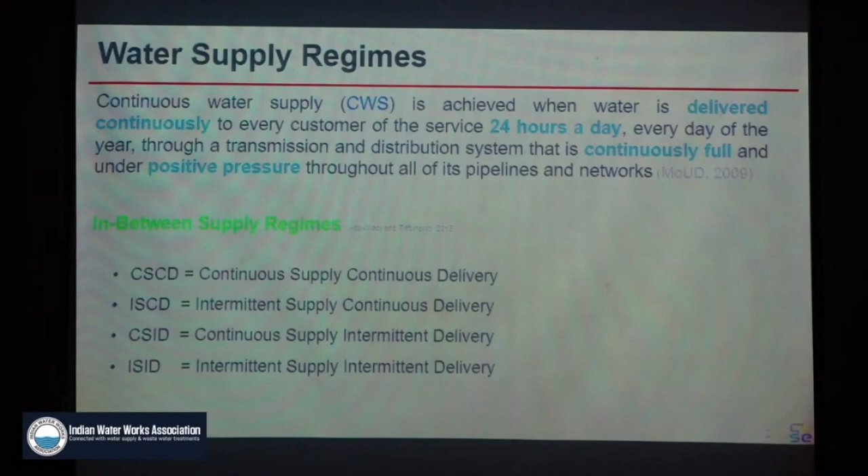So technically what that means is that we have supply patterns at the source to MBR, from MBR to ESRs and GSRs, and then we have the demand pattern exerted by the household - typically in the morning we get very high demand from consumers, and in the evening also we get some demand. But the peak factor given in the current old manual, the CPHEEO manual of 1999, dictates these kinds of peak factors, which basically assume that consumers are taking water directly from the municipality in a 24/7 fashion.

That is assumed in the design, that is envisaged in the design, but what is implemented on the ground is a very different situation or scenario. So what are the challenges for water supply engineers? It's a very challenging job in cities, because they are expected to supply water at a quantity of 135 or 150 LPCD.

In rural areas, the norms are different. They have to supply at a certain consumption pattern, not only quantity. Then there is expected residual pressure - currently we are trying to maintain 7 meters of residual pressure, or 0.7 kg per centimeter square. We have to design this for 30 years, or for mechanical parts, 15 years. Admissible losses have to be controlled to 15%, and we have to give good water quality, IS standard water quality. These are the challenges of a water supply engineer.

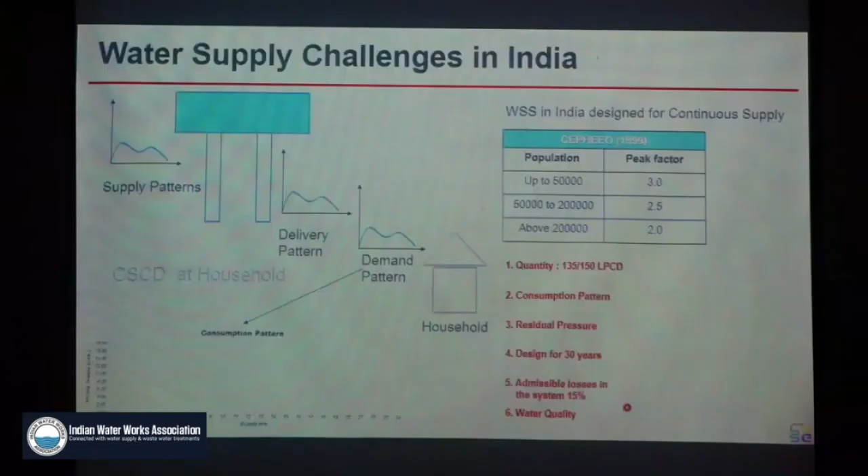So they are always on a task to perform on these particular parameters, to provide service to consumers. What is happening in India right now is we are following intermittent supply - sometimes intermittent up to the ESRs, and from ESR to household it is definitely intermittent in most of the cities.

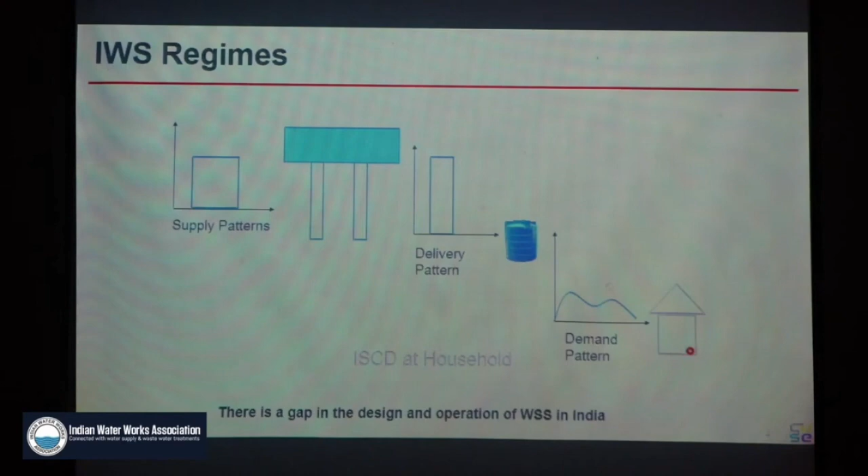And globally, this is not just India's problem. Let us understand that there is nothing unique about why it's happening in India - globally intermittent water supply exists, and a lot of cities face this issue. Mostly in the global south, we have this problem, and even in developed countries, the way they manage 24/7 is through highly pressurized systems, but it comes with very high cost.

Technically it is not very challenging to design a 24/7 water supply system. It is only about who will afford that, what is the affordability and reliability of that system. Africa, Asia, Latin America, Southeast Asia and India all have a tremendous amount of intermittent water supply. It's a global problem, and many researchers and universities are working on how we can fix this.

There are also opinions that in the current scenario, intermittency is also helping to reduce losses. How is this possible? We'll see - because if you have leaking pipes with very high loss, maintaining 24/7 will require more water than intermittency, and there are studies regarding this too.

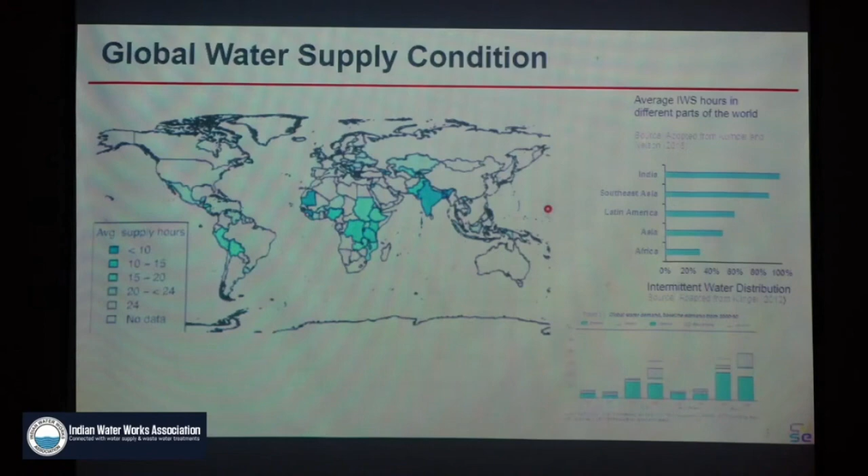So what is the reality we have? We have intermittent water supply ranging from 30 minutes to 12 hours per day, alternate day to once in a fortnight. Cities like Latur and Jalna receive very little water, once in a week or similar. Another issue is, even if we get water, there is inequitable distribution - some societies or areas receive more water than required, and some do not receive water at all.

Our government ministry is trying to fix the access problem, first providing access. Jal Jeevan Mission started when rural areas had only 18% household connections. Now if you check the Jal Jeevan dashboard, it's at 64%. So access is there, but whether we can reliably provide water in all seasons is the next big target. In cities, 60% coverage is there, and the situation is similar irrespective of water availability.

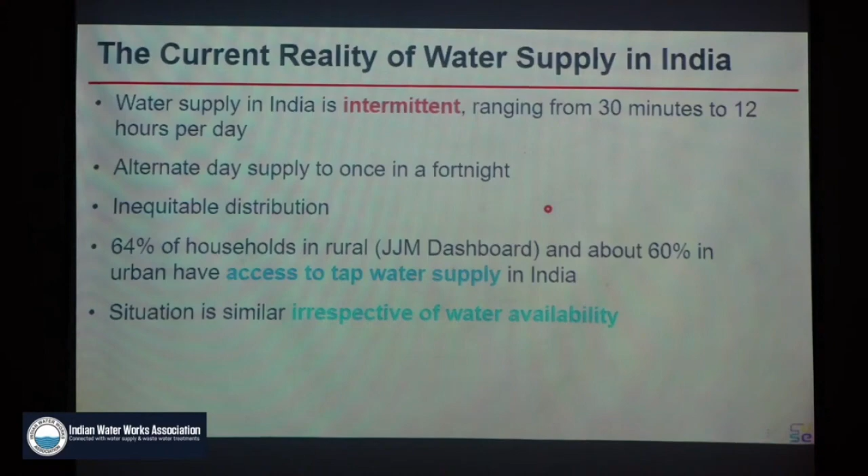So some people may get confused that there is water scarcity, hence intermittency - but that's not the situation. It is also because water that is available is not supplied or managed properly. For example, I visited cities like Ahmednagar and Nanded where water availability is not a question - the Godavari river is there, so water is there, but we are not able to distribute it properly, and there is alternate day supply, with some areas receiving water once in 3 days.

As Pathak sir has told, if people receive water reliably at a particular hour, consumers are happy - they are not demanding 24/7, because they are anyway storing, treating it at home, and then consuming. So their requirement is just daily supply. But there are 14 cities which receive water once in 2 to 4 days, 4 cities receive once in 5 to 7 days, Bid receives once in 8 to 10 days, and Jalna receives once in 10 to 12 days.

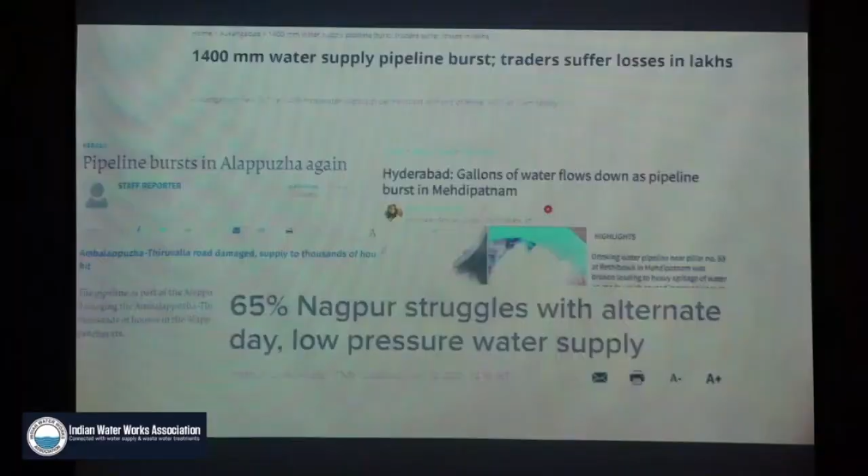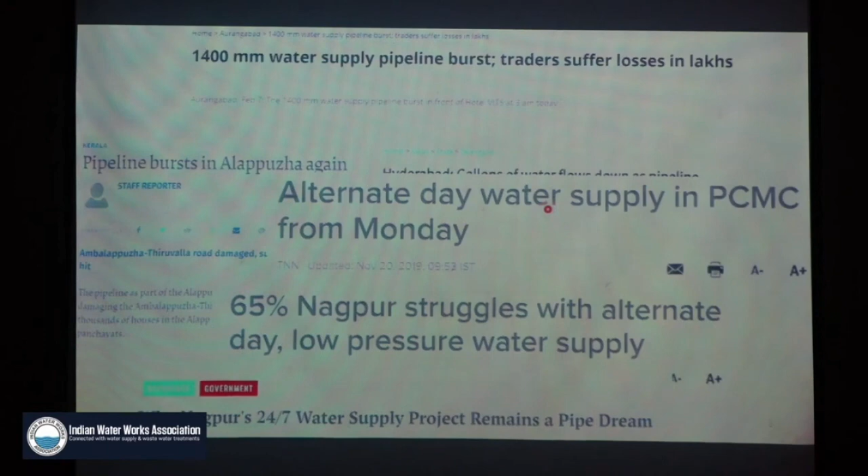So this is the reality we have in our cities, and nothing particular about Maharashtra. This is the scenario in the entire country. This is just news from Maharashtra, but if you see other news, everywhere there is a problem of pipe bursting, leakages. Nagpur city is struggling, most of the area is not getting water, in some parts it gets alternate day water. Pipe bursts in Kerala, Hyderabad, PCMC, and that's why 24/7 water remains a dream for many cities. We will discuss that.

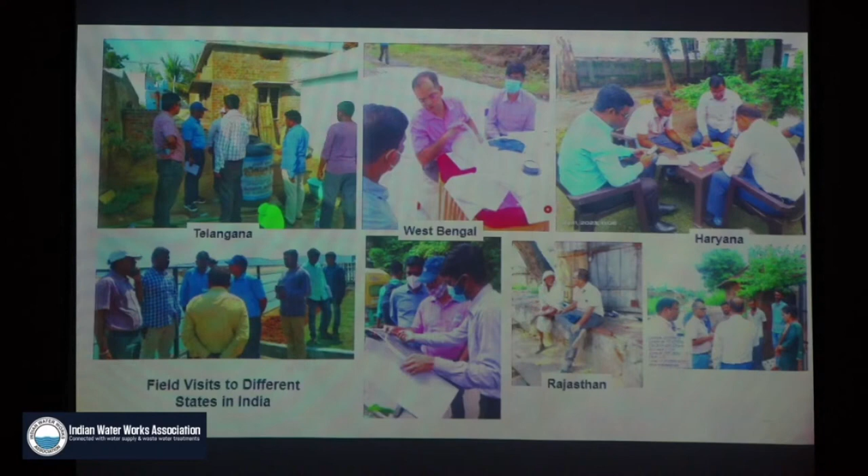So I have studied these water supply systems across India, whether it is rural area or urban area, variety of projects and research investigations. We have studied schemes and programs of different governments, different municipalities. I was part of one of the large projects of water audit, where we studied the water audit of around 30-40 cities, and the losses in the systems are 30 to 40%. In some cities it is 50%.

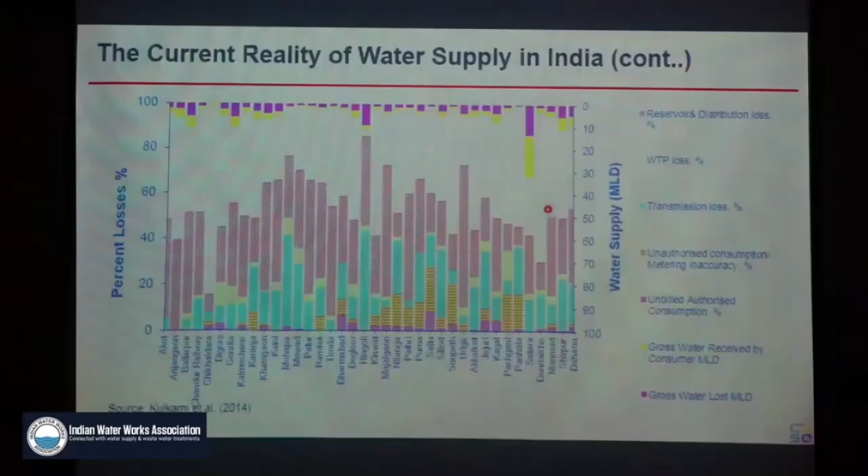So what is happening is we have tremendous amount of losses. Our pipe upkeep, pipe maintenance is not good. So whether it is the effect or cause, if you try to do a management study, we are in a situation where we do not know whether it is an effect or whether it is causing something else, because we are trapped in this particular vicious cycle of water supply system failure. What is a vicious cycle?

You start from any point and you will reach back to the original point again. That means we are trapped in a circle where our infrastructure condition is very poor because of lack of good planning, lack of good analysis tools, lack of good relevant design methods. We adopt design methods suitable for developed countries, very advanced sophisticated software tools which are not relevant to Indian conditions. We just adopt those tools blindly and try to design in offices and then implement. So we have tremendous problems in design and analysis itself - our designs are very theoretical, they do not correlate or match with the ground reality, and when the contractor implements that design, there is a failure, but nobody challenges what the consultant has designed, what was envisaged in the DPR, and what is happening on the ground.

So that is the situation we are having, and that leads to a poor infrastructure condition. Then we have poor service, that leads to poor service quality. That means people are not getting reliable water supply. People are getting alternate day water, people are getting low pressure, neighbors getting more water, you are not getting enough water, so people start using pumps and other interventions. So those things start happening, and as service quality is poor, consumer satisfaction is poor.

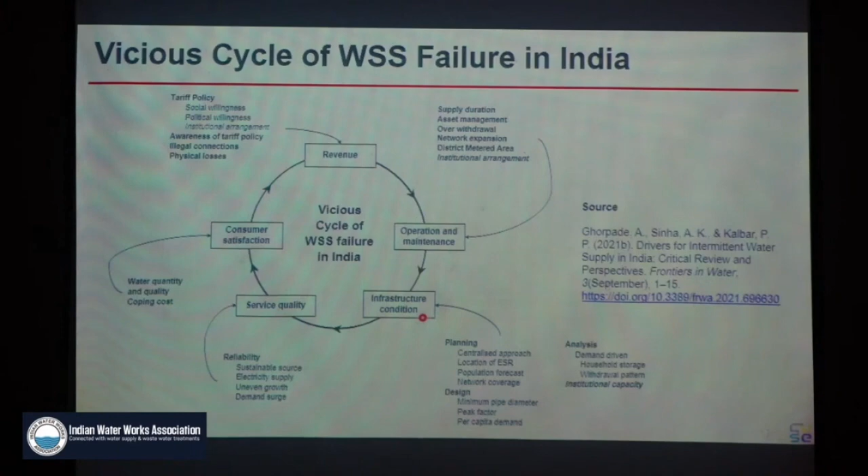So let us understand why we are then not getting 24/7 water supply. What are the technical challenges? Is it such a technically difficult issue?

If you open the 1999 water supply manual, it dictates a 24/7 guideline. We do not need a new consultant or some international consultant to teach us how we should have 24/7 in our cities. Yavatmal city is such a fantastic example.

Maharashtra Jeevan Pradhikaran, from 1972 to 1984, implemented 24/7 supply using a floating reservoir. We have just not documented it, and we have not replicated it enough for it to become our current practice of creating water infrastructure. There are very good examples from Maharashtra Jeevan Pradhikaran and different state departments of doing things differently and innovatively.

But we are not following our own good practices. That is the issue. Now our entire discussion right now is that developed countries have 24/7 supply. Why do we not have 24/7? The reason is not technical, but there are many other socio-economic conditions.

What developed countries have, and what any textbook or manual shows, is an arrangement where the average flow comes from the pump, and the city is served in between the pump station and the tank, with a floating reservoir. What is a floating reservoir? The inlet and outlet are the same pipe.

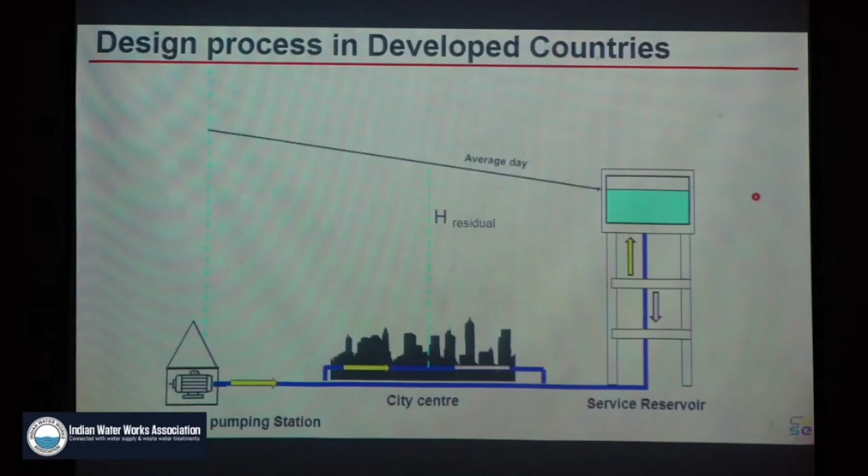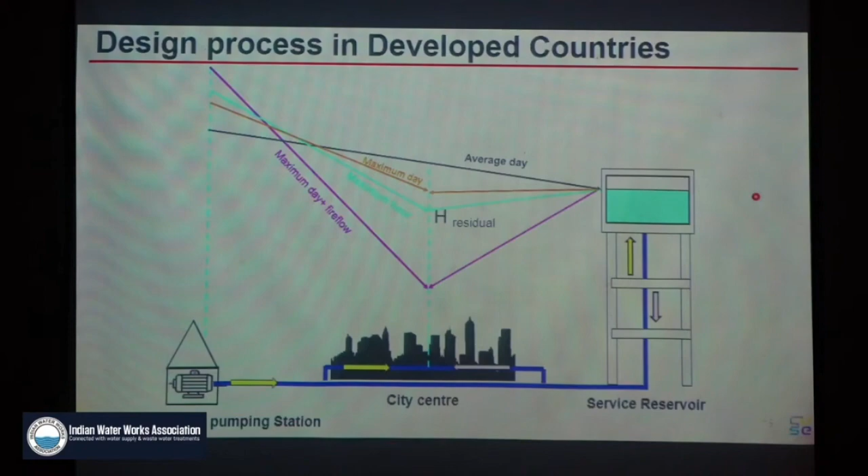What developed countries are doing isn't new, but how they manage it is they design their system not for maximum day demand or maximum hour design, but for maximum day plus fire flow. Their systems are equipped to supply water during fire flow also. That is the benefit of this particular arrangement.

Now, is it technically difficult to design? Many experienced practitioners here can design such a system. Then why are we not adopting this? The issue is the residual pressure required to maintain in this system is 17 to 50 meters.

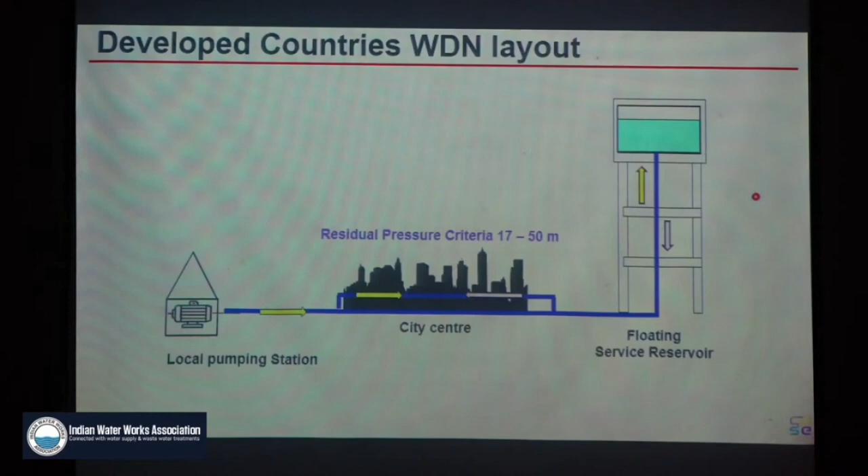That's too high a pressure to maintain. And to maintain such high pressure, you need very high quality pipes and very good operation and maintenance protocols at the municipality, which are typically missing right now.

We as a country are growing, learning, experimenting. So there's nothing to blame on any municipality, but if you suddenly try to do 24/7 in one zone, we fail because the upkeep isn't happening. Somebody can replace all the pipes, bring new infrastructure, supply more water, and do 24/7 -- that's technically not a challenging problem.

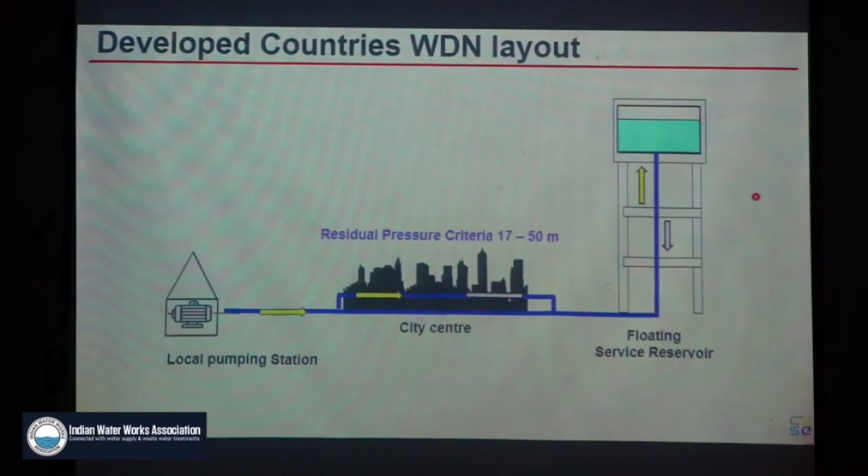How you can do 24/7 with low cost and low resources, innovatively, is the real need, and we have to do it in our own way, not what developed countries are doing, because the technical design is very easy. The socio-economic concern is: who will bear the cost?

Currently there is no demand because people have invested in storages -- household storages. Everybody stores in a sump or overhead tank, which is not assumed in the current design. So our design guidelines do not match the ground reality. And how are we managing then?

We manage by raising water, whether by gravity or pump, to the ESR or GSR, and then supply it to the city. Now the pressure we're trying to match is 7 meters, 12 meters, or 17 meters. Typically, I have not seen the average zonal pressure reaching more than 7 meters in cities. So we have not even achieved 7 meters as a benchmark yet -- we are still struggling to achieve good pressure everywhere.

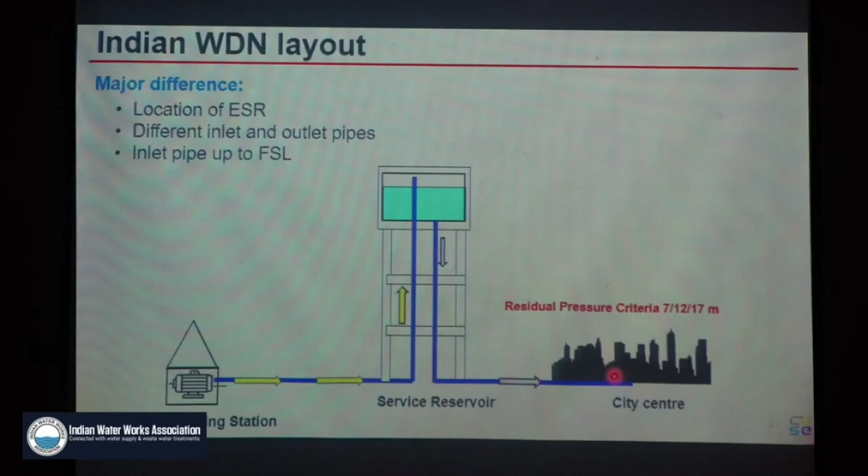So the hydraulic model we use assumes that the water level is at the lowest level of the tank. You start your level from the lowest point in the tank -- that is the worst condition -- and we design the entire system from there. But what happens is the withdrawal capacity. What is withdrawal capacity?

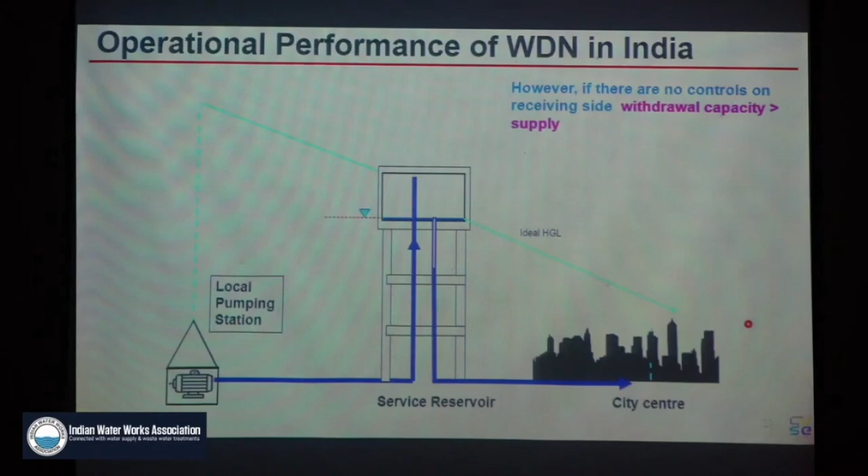Consumers fetch water because they have not received water for the last 23 hours. As soon as supply occurs, they try to fetch all the water in one moment. So the withdrawal capacity is too high compared to the supply, and that gets the tank empty.

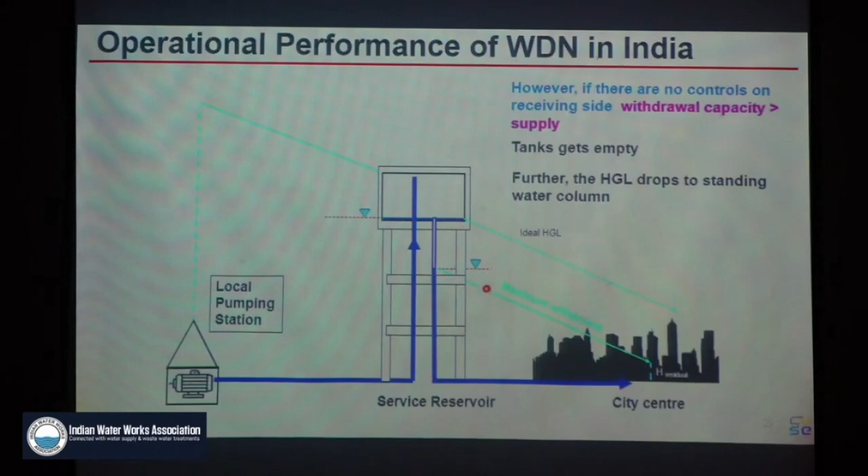In many municipalities I have observed tanks are bypassed. Many cities are bypassing the tanks, where the transmission lines or bulk transfer lines are attached directly to the distribution. That is the scenario we are operating with. And this is the operating level we have to understand, to see at what level the tank is actually performing.

This kind of measurement we are doing in a variety of cities, and this is one video from our lab which shows that if the withdrawal is very high, the water level goes down. So the water level is somewhere here.

Tanks are always running low, whereas if they are not at that level, air entrapment happens from the tank itself, and we get an air-water mixture in the network, which is very difficult to predict in terms of how it will behave in the entire water network.

So we have air entrapment issues in the system. Our tanks have issues with filling and operating at full level, and intermittent water supply adds air to the system. Talk to the people who operate it and they will tell you the difficulties they face in taking air out of the system. Our hydraulic models do not account for such scenarios in a routine DPR design, so our operating levels end up somewhere in between.

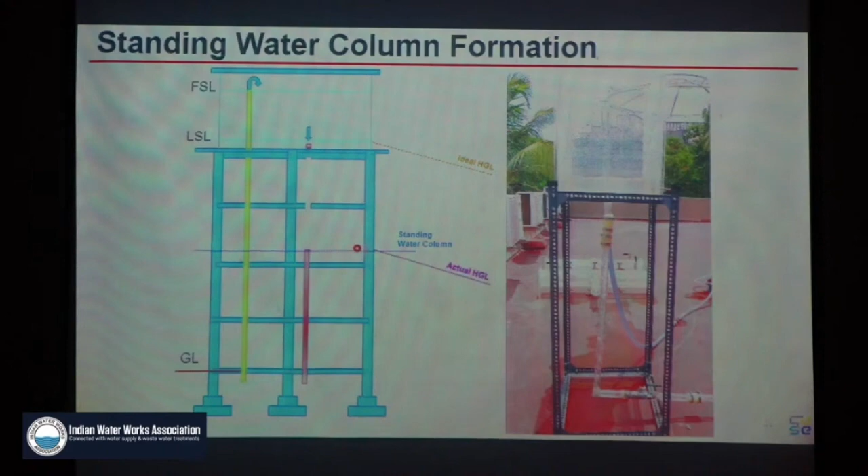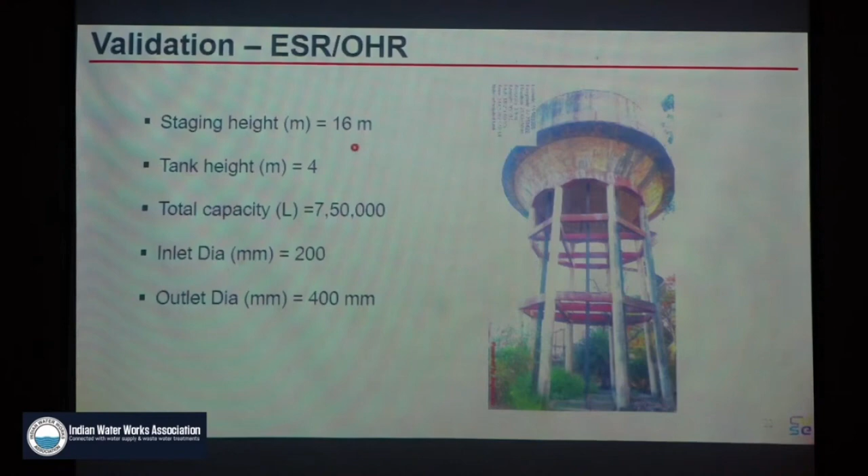Based on this, we have developed some new methods of hydraulic modeling. With this confirmation after lab tests, we have gone to many places and studied them. This is one city where they had an overhead reservoir with a 16 meter staging height, and what we observed is that after 40 minutes the tank gets empty because of too much withdrawal.

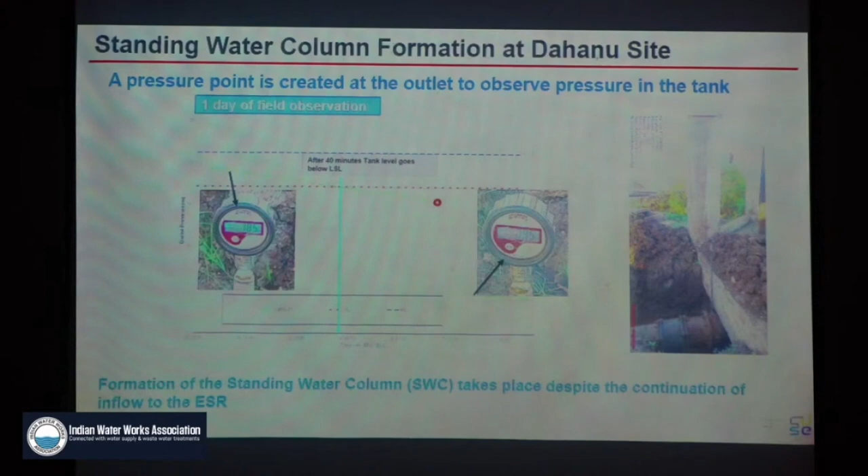This kind of ground validation I don't see in the DPRs. Those kinds of ground studies are not happening, and we just assume a theoretical design of 24/7 supply, thinking we will achieve 24/7, which will not happen.

Then what is happening? On ground, our field engineers face tremendous challenges to supply water, because the design says something else while the ground reality is something else. So what are they doing then?

What they are doing is, typically the land is allocated only at one place. That's a municipal planning issue. Tanks need to be distributed across the city equally, only then will the hydraulics work. That's why hydraulic engineers have to communicate with the municipality.

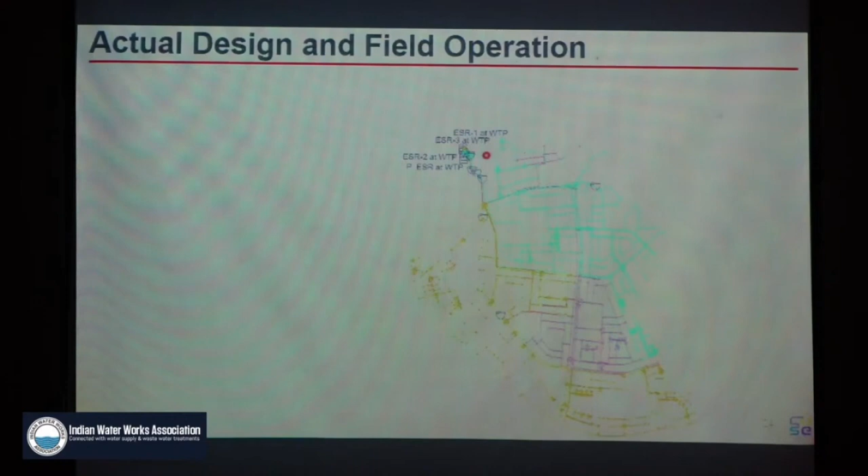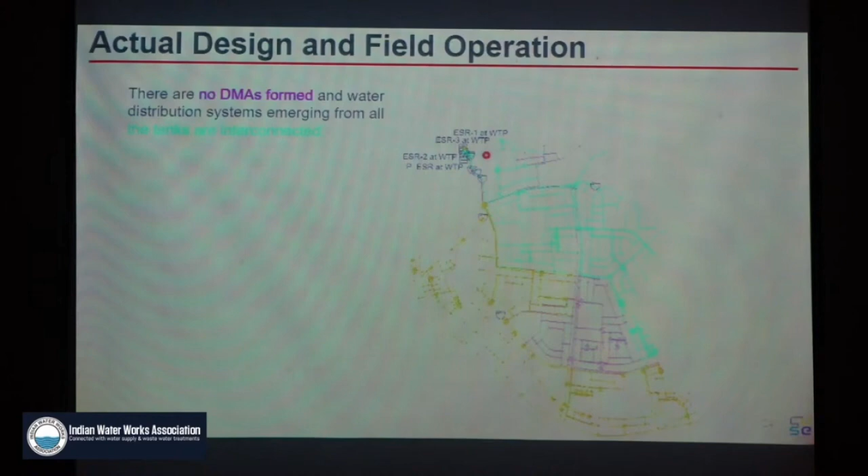All the land is allocated only at one location, and there are no district metering areas, DMAs. It is impossible to implement these DMAs because of the segregation needed. In India, a lot of political interference happens on ground, so you may design a DMA, but after one or two years people will fall out of the DMA and interconnections will appear.

There is no control on withdrawal. Even if you consider 10 liters per minute as the flow from a tap, multiply that by the number of consumers, and you will see the withdrawal capacity is much higher than the supply. So your tanks will ultimately get empty.

So the resort the operators or field-level engineers take is to create small zones like this, two small zones, put a valve, another valve, operate one valve for 30 minutes. One zone they will supply for 30 to 40 minutes, then close that valve, open another valve, and supply the next zone.

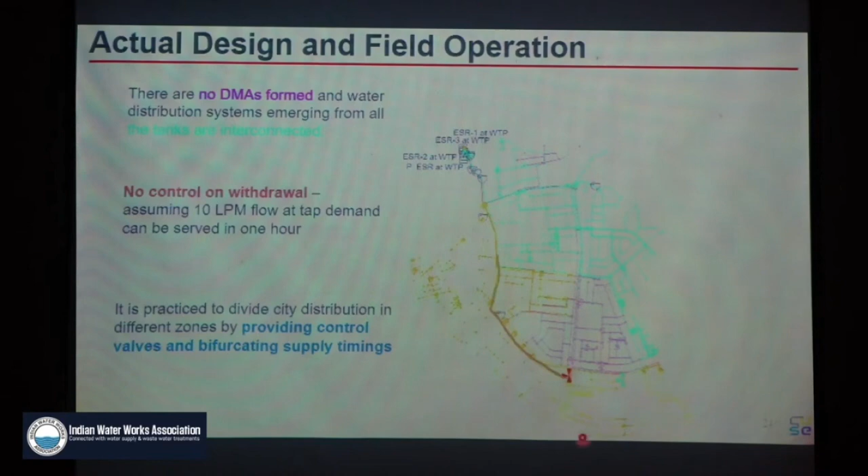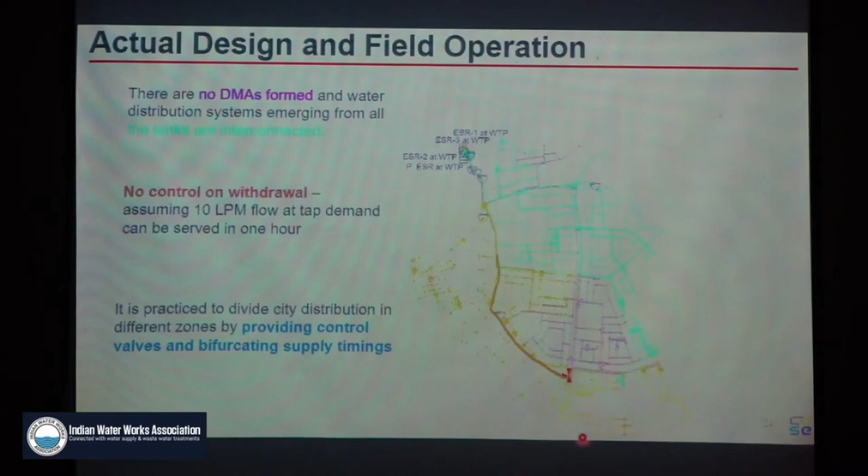So in the city, one zone has many operational valves, which increases wear and tear and reinforces the vicious cycle. That's what I mentioned in the initial slide - we are stuck with this particular operation, which reinforces the poor performance of the system.

So the big challenge is whether the current hydraulic modeling is relevant. The current hydraulic modeling is demand driven, meaning it assumes the consumer is wise and will close the tap when water is not required, and that they have meters - but that's not the real scenario. So our hydraulic models also do not account for storage.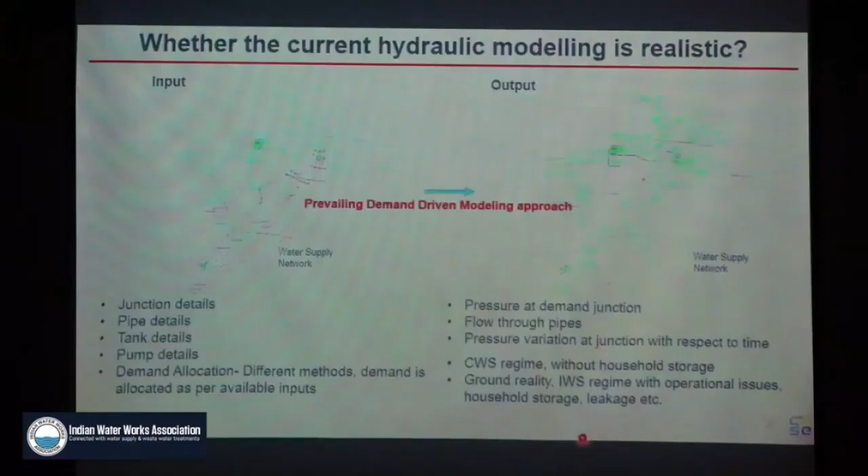But that's not the reality. Every household has storage. So our hydraulic models in practice are not relevant in the current time. So we have developed a new hydraulic modeling method called flow-starved water networks.

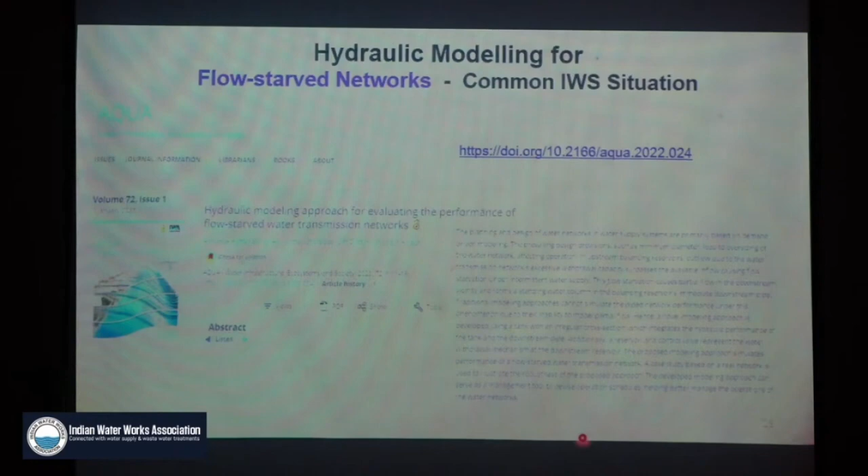How we can model the flow starvation situation - that is one of the research projects for my PhD student, who has developed a new method of flow-starved water network, because whether it is transmission line or distribution line, we have flow starvation as a phenomena.

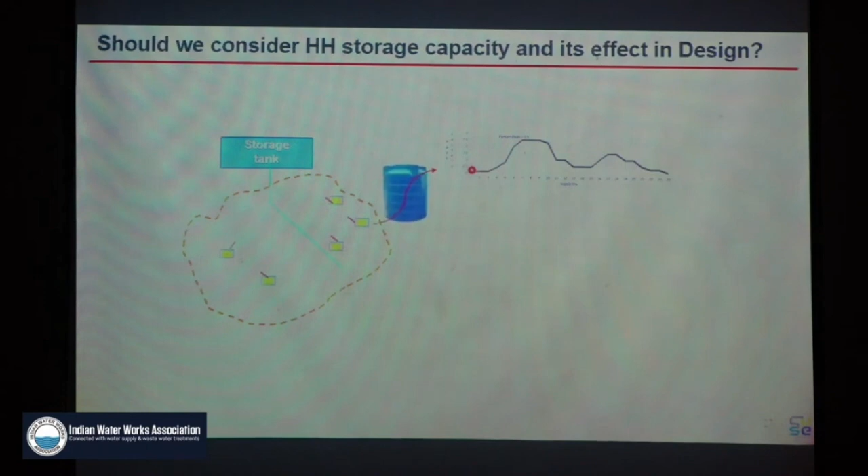And then we have to take into account household storage capacity in the design. We cannot keep ignoring it, because the manual says this is the consumption pattern, but in between comes the storages, and unless we account for those, we will not be able to successfully operate the system.

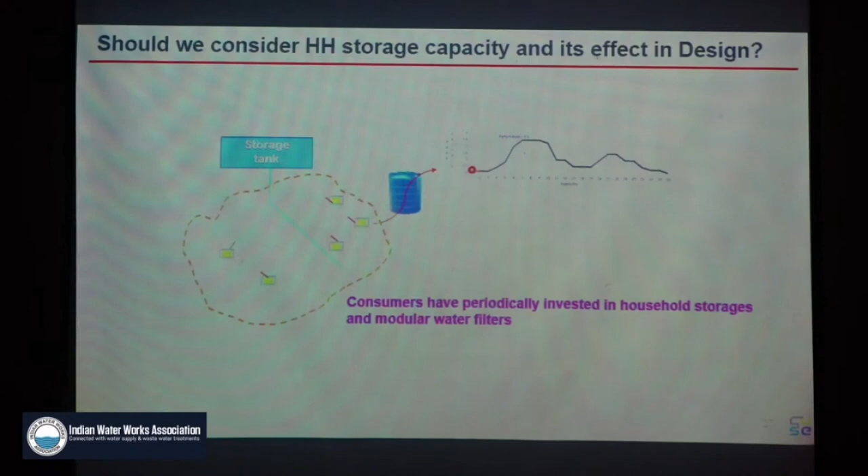So consumers have periodically invested in household storages and modular water filters. They are basically happy if you supply for 1 hour with good pressure and good flow.

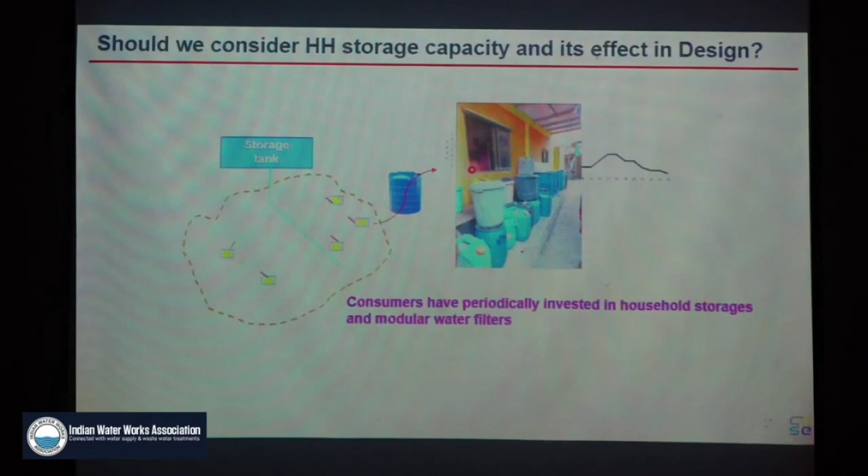And this is from the village scenario. Go to any village, so many drums and plastic containers they have to store water for 2 to 3 days. And you go to housing societies, they have big sumps, 2 to 3 days storage in the housing societies.

So whether rural or urban, we have the same scenario, and hydraulic design models have many data gaps. So if somebody is saying that I have a hydraulic model and everything will be solved, it is not the situation. The ground reality is very different.

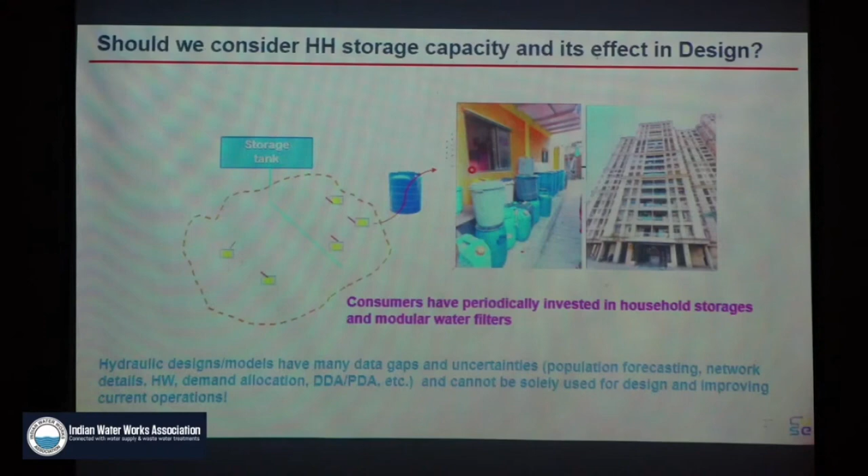We have air entrapment, we have tremendous data gaps, we do not know what the pipe situation is on the ground. So we have to take hydraulic models as a decision support and not the final decision, because if the hydraulic model says this, that doesn't mean everything will function properly. That's not going to happen.

So what is the quest for 24/7 water supply in India? Where is this quest coming from? Basically in 2003, the government of India started this particular initiative, that the essential goal of cities should be 24/7 water supply. There is no disagreement about it, that we should have 24/7.

And there are a number of pilot projects in Karnataka. World Bank has funded this particular initiative. They have tried, but there are no replications. And based on the evidence from developed countries, continuous water supply has benefits, but it comes with a cost - the cost of higher tariff, cost of better operation and maintenance requirement.

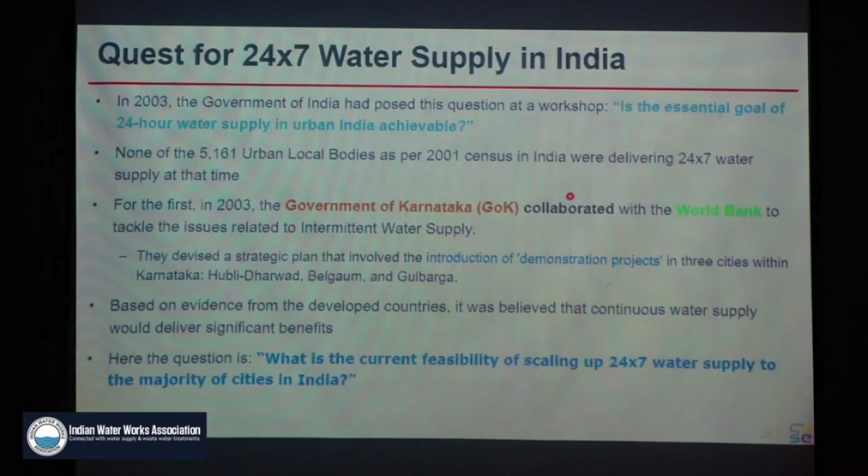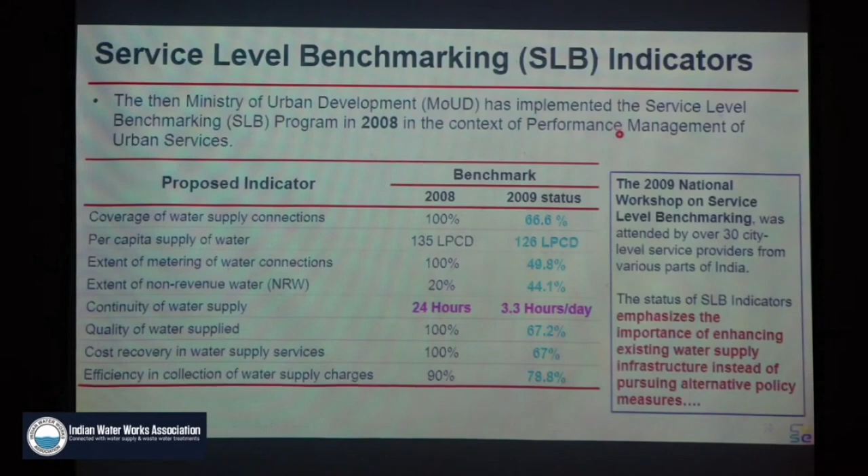So the question is, what is the current feasibility of scaling up 24/7 water supply to the majority of cities in India? We have forgotten the service level benchmarks altogether. That was the initiative started by the then Ministry of Urban Development in 2008-12, and we have not achieved the basic service level benchmarks, but we want to plan for 24/7. I think it cannot be a goal for cities to directly jump from not achieving service level benchmarks to 24/7.

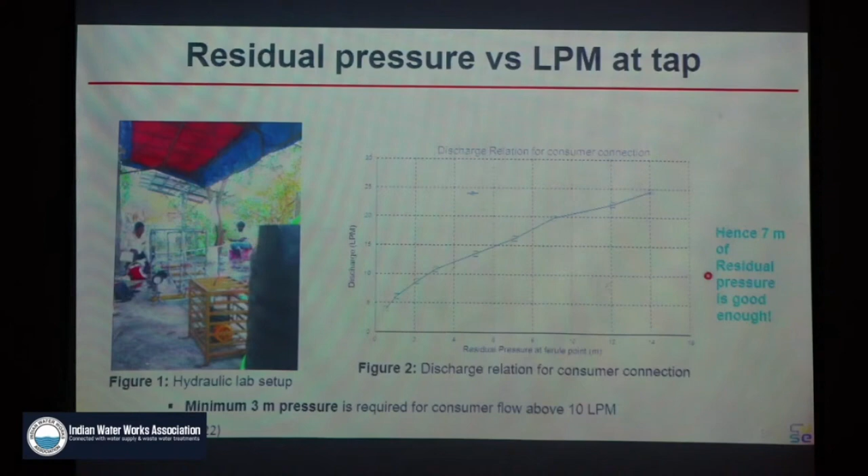If somebody wants more than 7 meters, that has to be justified - who will bear the cost has to be justified, and it is also international practice. Thames Water UK, which runs the system 24/7, their design guideline is 10 meters - 10 meters they are expecting in the ground.

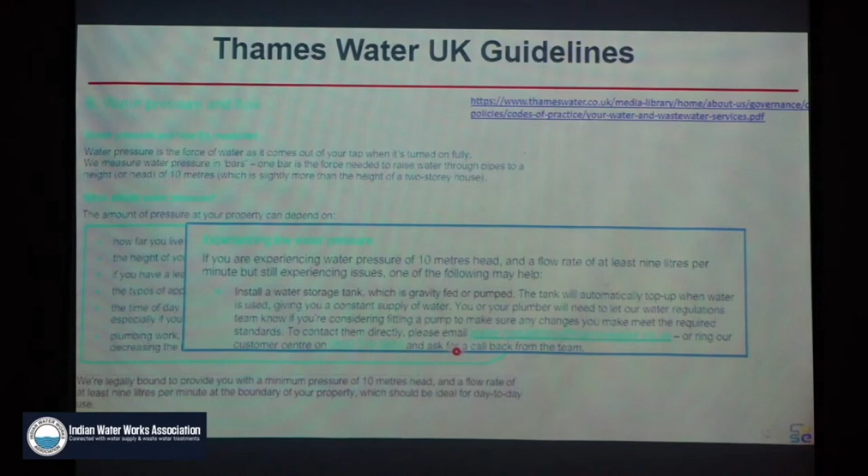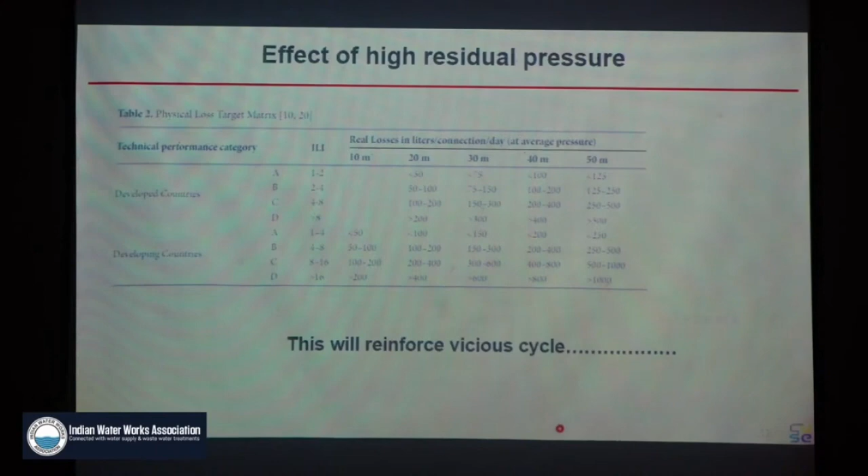So there is no need to revise the current guidelines of 7 meters, because we are struggling with achieving 7 meters first of all. The issue is, if you raise pressure in the system, it will lead to higher losses, because pressure and leakage rate is directly correlated. So if you have higher pressure, more leakages will occur in the system, and so unnecessarily if you try to pressurize and do 24/7, more losses will occur, more water consumption will happen, and that will lead to more economic losses to the municipality.

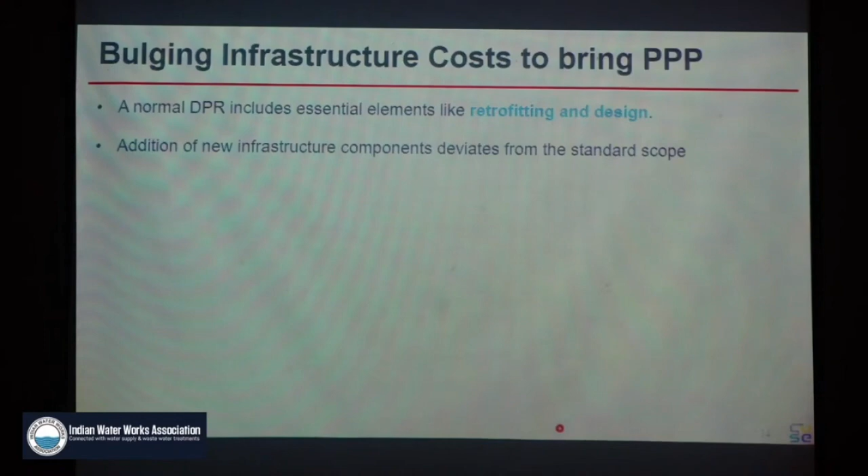What is happening is bulging of infrastructure cost. People want to bring PPP, and there are experts of PPP here to talk about it. But what I observed is a normal DPR requires retrofitting, but for the sake of bringing public-private partnership and many other things, DPRs are bulged with new pipelines, new household service connections, new metering, and many other things - automation and SCADA, which may not be relevant for a particular municipality, and unnecessary inclusion of new components is happening. The cost is inflated, and the DPR is made bigger. And that's what everybody wants, because a bigger DPR means everyone is happy in the entire supply chain. So that is what I observed as an academic viewpoint.

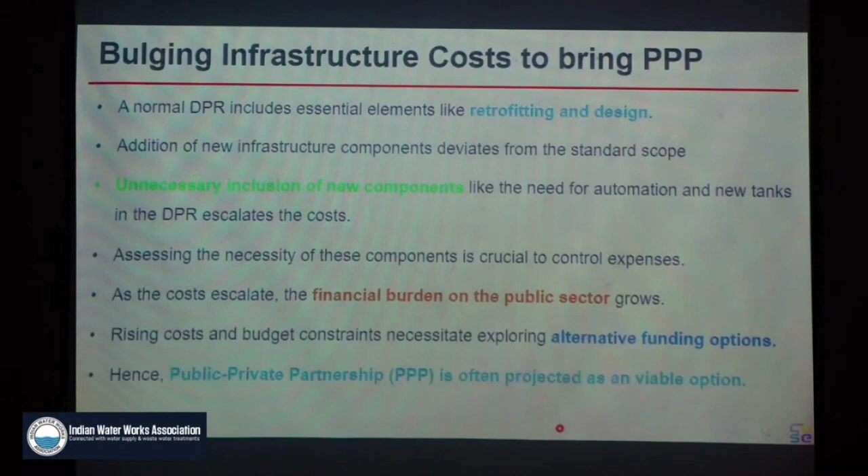This is a financial burden on the public sector, because unnecessarily replacing all the pipes and bringing automation when not required is a financial budget problem. There are resource constraints in 24/7 supply, as ULBs have financial constraints and rely on funding from national schemes.

Average connection cost is around 10,000 to 20,000 rupees, varying by city depending on topography. Hence the investment required is 1.2 to 2 lakh crore rupees. Where will this funding come from if we keep replacing pipes and bringing new such projects? We will never be able to cope with the new infrastructure needed for 24/7.

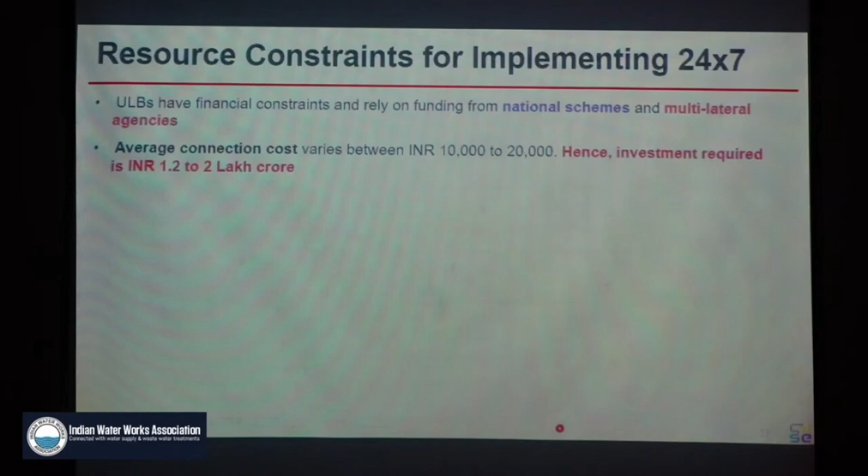So we have to take the retrofitting approach, because even JNNURM and AMRUT have limited funding. It's not like infinite funding is available. Hence there will be no sufficient funds available anytime. People say, oh we have funds, but you have funds for 5 years now. What will be the upkeep of the system after another 5 years? So we have to do things differently.

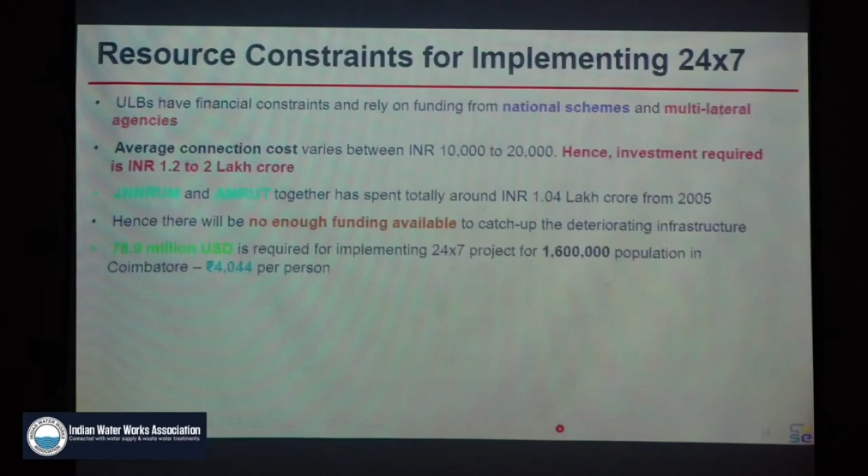The cost of connections has to be declared in each project. At the same time, increasing tariffs is extremely difficult. The DPR may have an assumed tariff system, but when the operator or municipality goes for implementation, there is tremendous opposition. So again we are back to square one, no funds for maintenance.

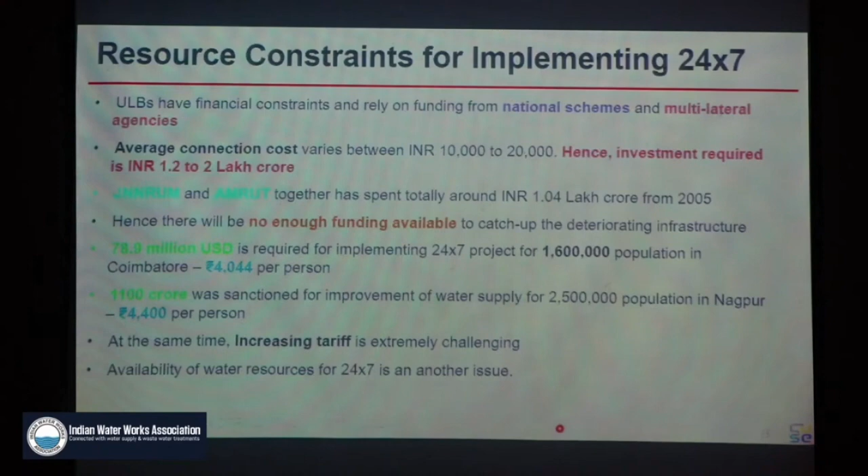And availability of water resources is sometimes constrained for 24/7. So what's wrong with the 24/7 model then?

Assumptions and flaws: the 24/7 models implemented in India assume there will be good engineering and management practice, which is missing in the country. Even if you have a private operator, the upkeep remains poor.

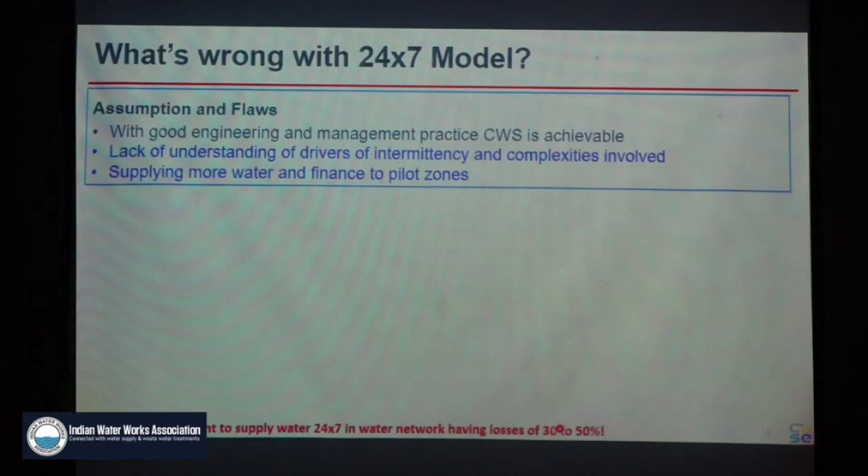There's a lack of understanding of the drivers for intermittency - why systems converted to 24/7 shift back to intermittent mode. One zone can be supplied more water, 2 or 3 times, and declared 24/7. Is that wise? Is that a true 24/7 strategy - replacing all connections and pipelines in one zone, supplying more water, and declaring it 24/7? I don't think that is true 24/7 in any sense.

There's also bias in pilot selection. The peripheral zone, the easiest option, is selected as 24/7, not the hardcore core city. And the selected pilot projects have low cost - anywhere you go, they have lower cost than other city zones.

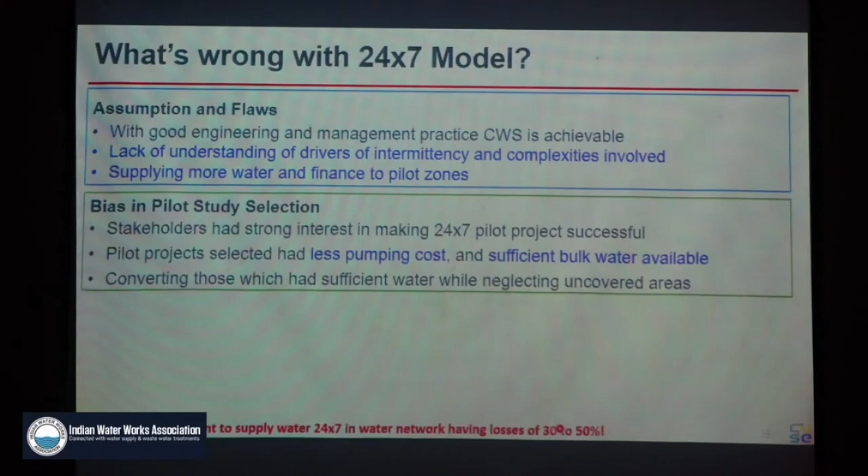Then there's consumer behavior. I have seen many 24/7 projects where consumers still store water in the house. They will not give up their storage - they store, filter, and then drink. There's also a floating ball valve in the tank, which closes whenever the tank gets full. So consumers are anyway withdrawing water as if in intermittent mode.

So why supply 24/7 at all? This needs to be assessed on a case-by-case basis. Is it prudent to supply water 24/7 in a network having losses of 30 to 50%? You may lay new pipelines, but 5-6 years down the line they will again have more losses. This wise crowd can decide whether such a scenario should be implemented.

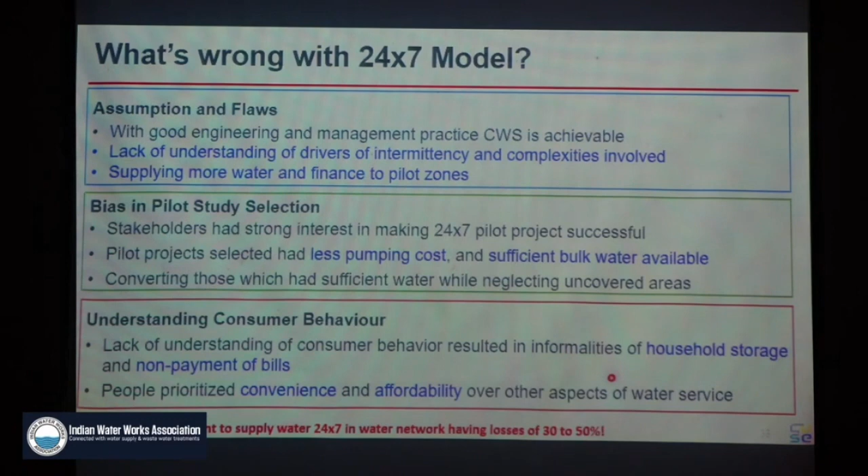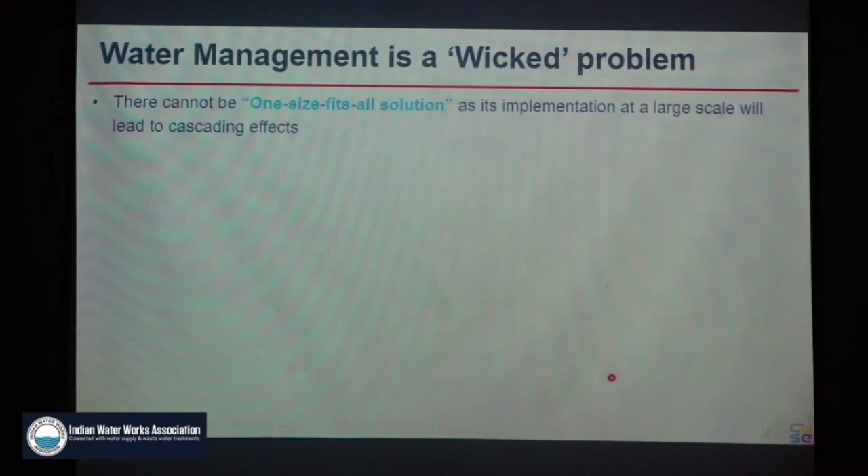Now I'll talk about why we need alternate pathways. Water management is a wicked problem - approaching it from any side is difficult because we haven't understood the problem correctly first. Shooting solutions without understanding the problem creates more problems than the solution itself. There cannot be one-size-fits-all solution. Deciding at one level that everyone should follow the same approach will not work in our diverse country. Each city has its own different topography; central areas have different demand than peripheral areas. So one solution will not work everywhere.

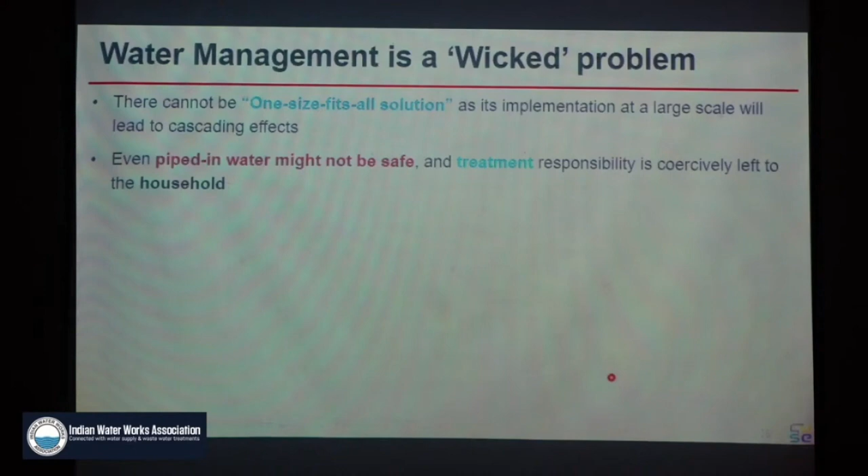Even piped water might not be safe, because pipe water supply may also have contamination. So people are always resistant to drink directly from the pipe - they will always use a filter. Ultimately, the treatment and quality part is left to the consumers, whether said or unsaid.

Household product models are not scaling up. We have household water filters, but we are also spending on water treatment at the main distribution system level. People's ability to take personal responsibility is shaped by their circumstances - if they get only 1 hour of water, or contaminated water, they will install filters, and that has happened historically in India. Even slums and communities have community drinking water arrangements, with jar systems from filtration.

Research regarding safe water has focused on point-of-use or point-of-collection models. Now developed countries are shifting to not a centralized water treatment system but a decentralized one, because treating it centrally and bringing it to the consumer will again add contamination. So people in developed countries are researching how we can treat at the point of use, whether at the household level or at the community level.

Safe drinking water is often conveyed as a short-term measure with no discussion of when long-term measures will be implemented. So only short-term initiatives are taken.

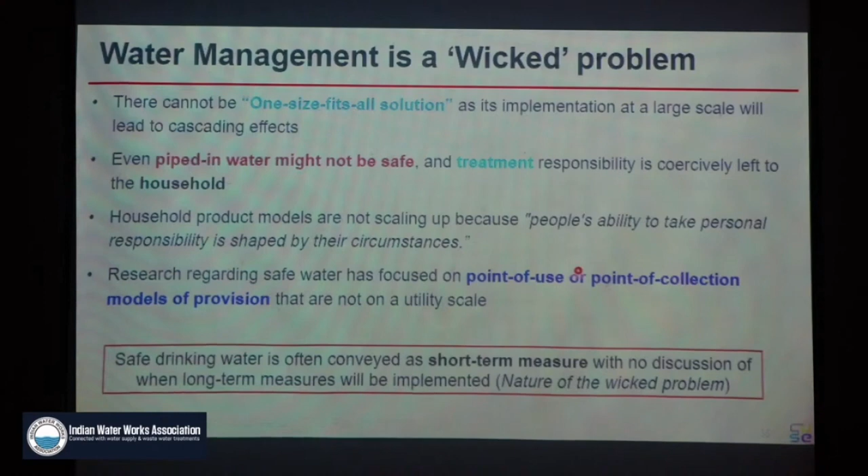Why do we need alternate pathways? As I said, it is a wicked problem, and a 24/7 system is financially unsustainable, with very high operational and maintenance cost, and more data other speakers may show. Safe water quality is not ensured even in 24/7 systems. No replicable and sustainable model exists in India. Emerging contaminants is a big issue.

Fortunately, Mumbai has surface water sources, but many cities rely on river water or groundwater, and those are getting contaminated. So even if you have treatment, that treatment will not remove emerging contaminants such as microplastics, pesticides, residual pharmaceuticals, and very toxic pollutants that are available in the river system nowadays. So we need to rethink this entire problem.

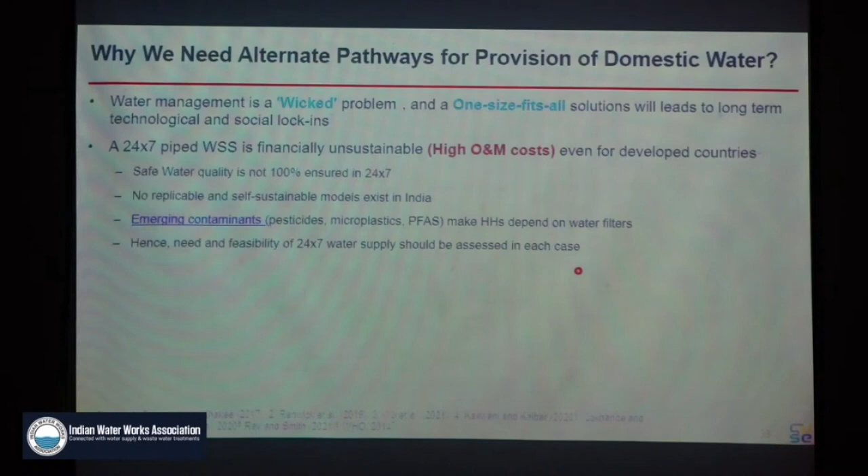Hence, the need and feasibility of 24/7 has to be taken into account, and focus on treating the required quantity of human consumption, because we need 3 to 5 liters of water for drinking. Treating the entire volume of 135 liters to the highest quality - we have to think now whether there can be any other alternative model, and that kind of experimentation needs to be done.

So diverse and distributed water systems with provisions of circular economy, because circular economy is needed in today's time. That means we have to recycle, reuse, reclaim the water in our systems, and then segregate the drinking water quality from other quality of water, so that effectively we will bring sustainability and resilience to the system.

So scale decentralization - that means we have highly centralized systems, one water treatment plant for an entire city. That will not work in future, because if that plant fails, what will the city do? Delhi had a flood problem, and most of Delhi was affected. So we need a scale decentralized system - smaller systems, not very small, but scaled systems, in a decentralized way.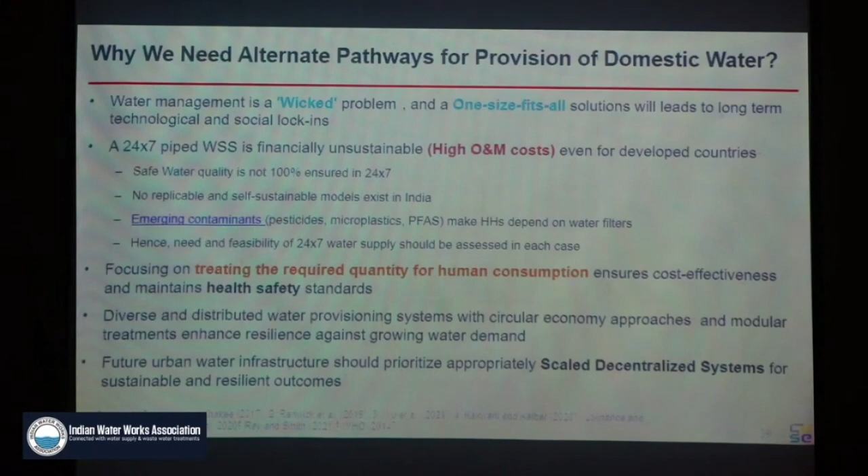That is the way - that is what I call leapfrogging. Mistakes developed countries have made, we have to avoid, and we have to leapfrog to more wise, better systems in our context.

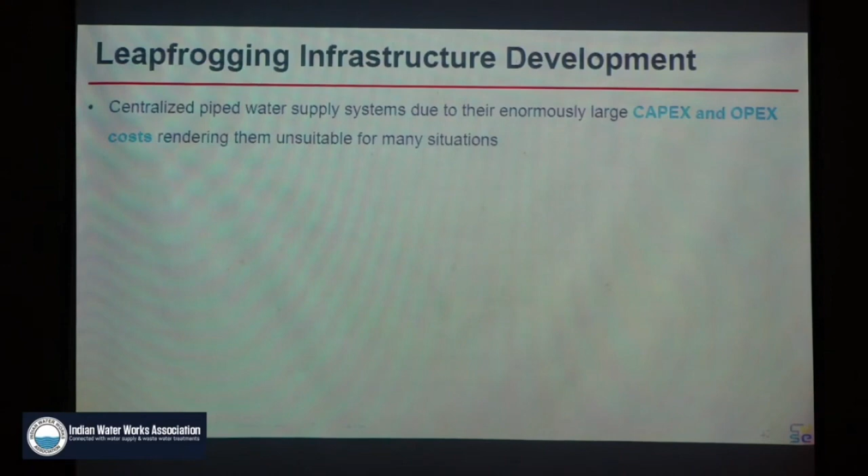I have a strong belief that our engineers in municipality and state governments have good capacity. They need a better chance to design systems as they want, because centralized systems come with high capex and opex. And even if 24/7 supply ensures water that meets current standards, residents will still use household filters, because they will always be worried about water quality.

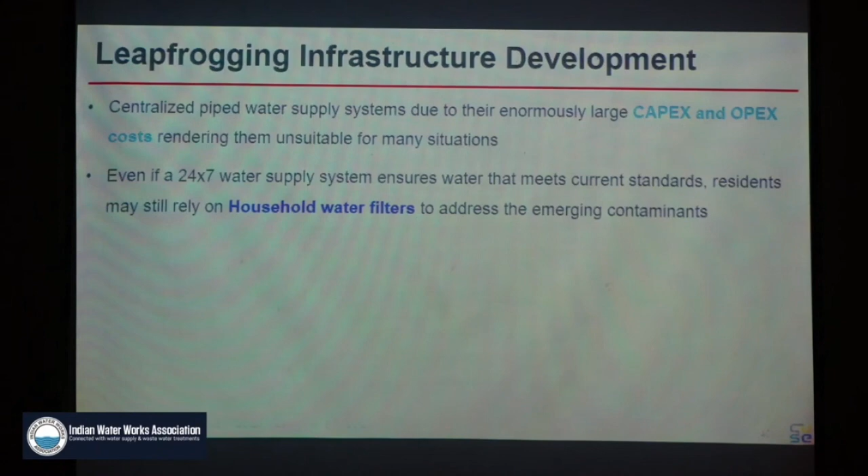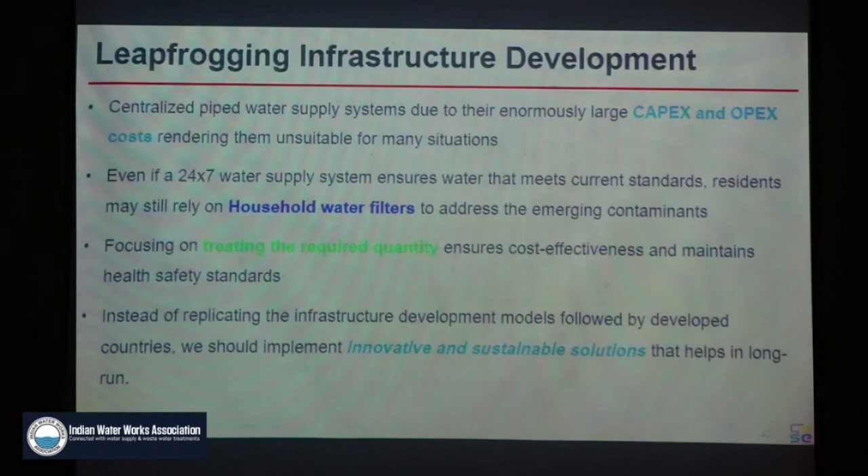So focusing on treating the required quantity ensures cost effectiveness. And instead of replicating the infrastructure models of developed countries - because most of the time we are following what developed countries have done and not what our country needs - innovative and sustainable solutions are needed that will help us in the long run.

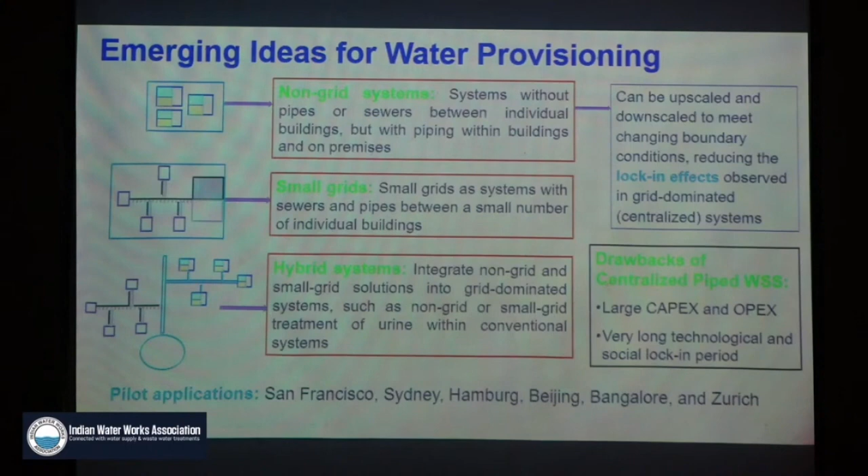So emerging ideas are small non-grid systems, small grid systems, and hybrid systems. These three kinds of systems we need to follow and experiment with, not the 24/7 kind of system always.

In summary, water management presents complex and multifaceted challenges. There are tremendous amounts of challenges in this particular arena. Solutions to water management problems may have unintended consequences and require adaptive strategies, because if you do not keep flexibility for the next 20-30 years, we will be stuck in the system for a very long time.

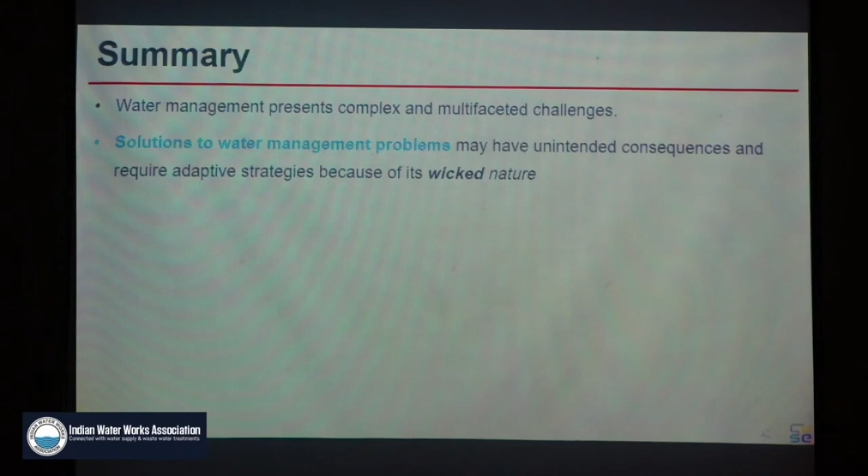Breaking the vicious cycle of water supply systems requires meticulous planning, which focuses on infrastructure development with a retrofitting approach, not a new infrastructure approach. So we have not worked on the retrofitting approach.

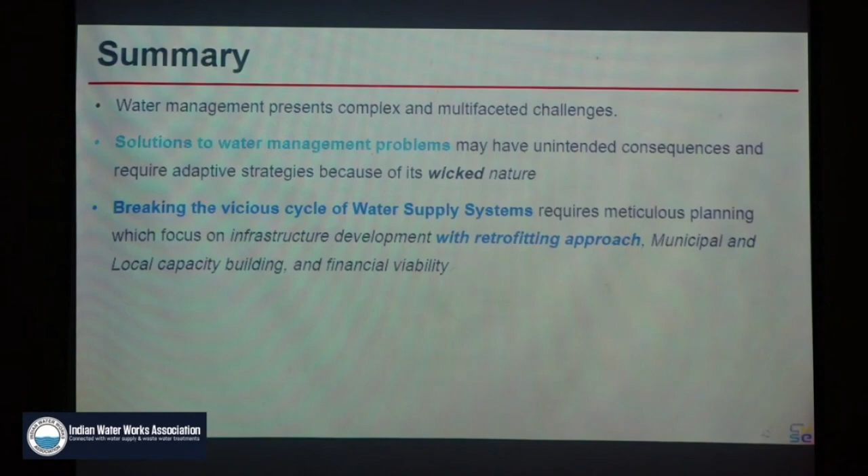Municipal and local capacity building and financial viability need to be taken into account, because if we do not take this municipal capacity into account, we will not be able to cope up. So the potential benefits, drawbacks, and affordability of 24/7 has to be taken into account before its implementation, not after implementation.

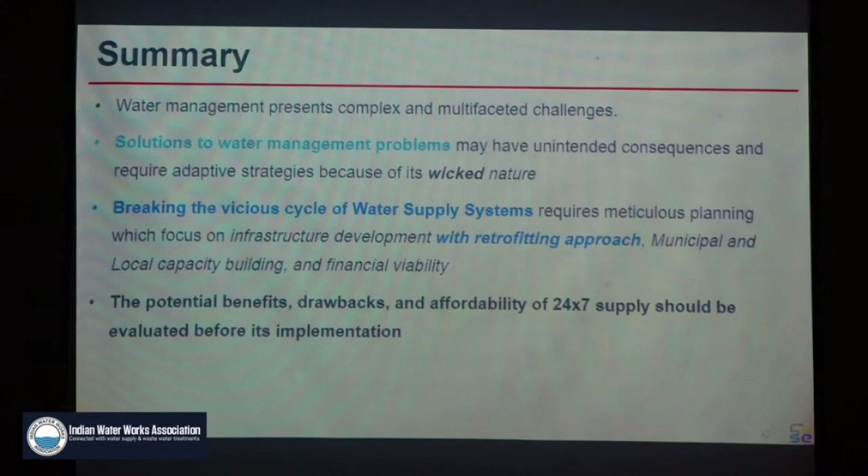Alternate ways of water provisioning - there are no other innovative models implemented, whether we can segregate drinking water quality from other water quality, whether we can use small-scale systems, gridded systems rather than a centralized system. Those programs, missions, or innovations are not happening.

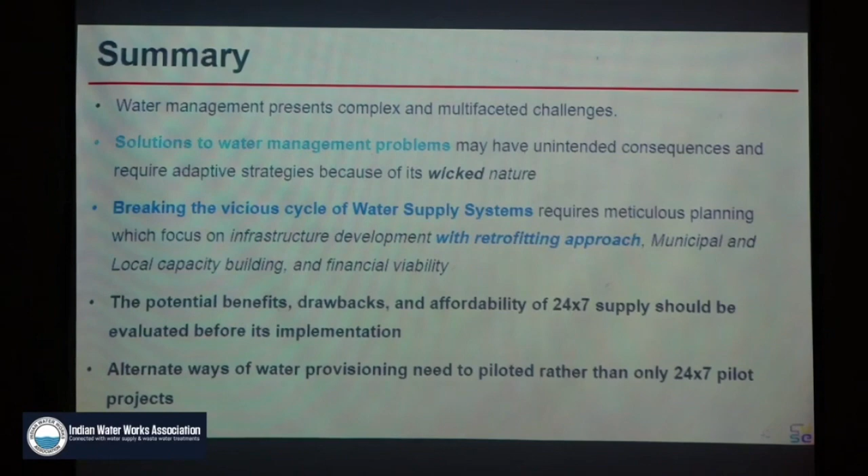So I think we have to walk on that path, rather than just replicating 24/7 as the one and only solution for our water supply systems. Thank you.